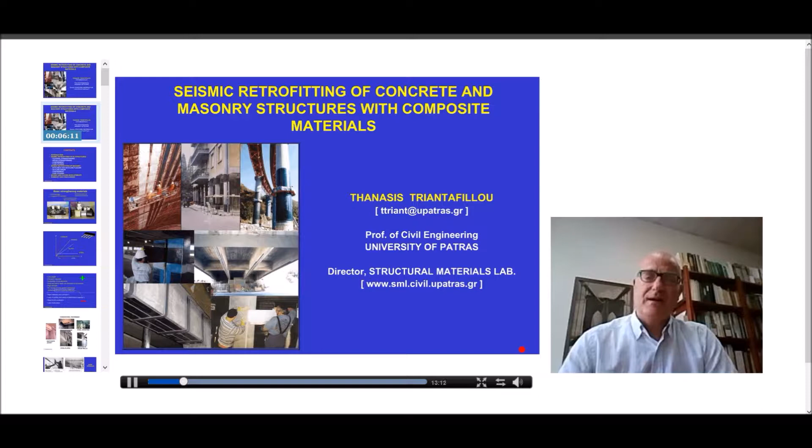Okay, thank you very much, Emmanuel. Also from my side, let me welcome everybody to this short lecture on seismic retrofitting of concrete and masonry structures using composite materials. Good morning or good afternoon or good evening, whatever, depending on where you come from. It's a real pleasure to have you around, and without spending any more time, I would like to move directly to the structure of my presentation.

I will start with a brief introduction on the topic, and then I shall present concepts and some details on seismic retrofitting of reinforced concrete structures with regards to flexure, shear, as well as confinement. We will also present some case studies on the topic, some examples.

Then I would like to spend some time on seismic retrofitting of masonry structures, unreinforced masonry structures, subjected to in-plane or out-of-plane actions like flexure or shear, also for confinement. Again, we shall see some case studies.

And if time permits, I really hope so, we will present some relatively new concepts on the use of non-polymeric materials for seismic retrofitting of concrete and masonry, and the presentation, of course, will close with a short summary and the basic conclusions.

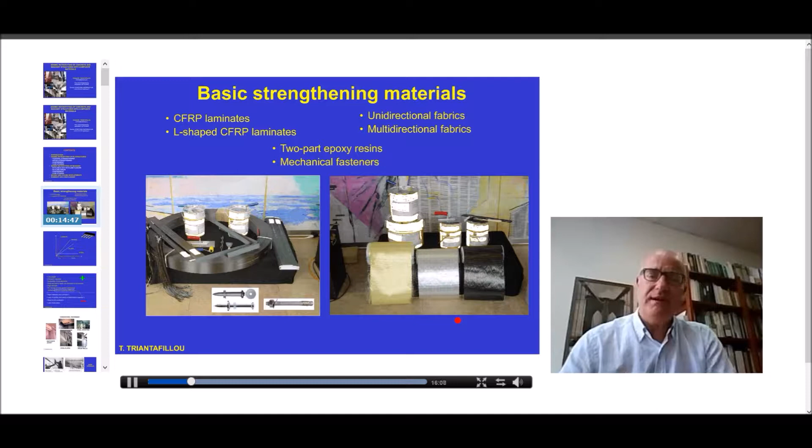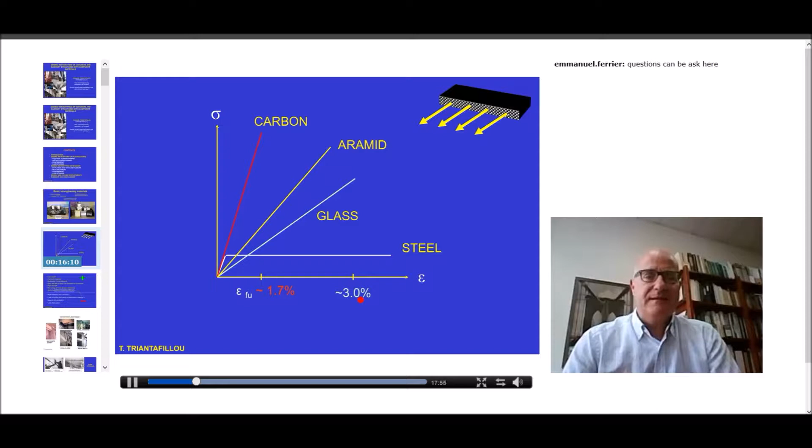So those fibers go linear elastic all the way to failure. They do fracture in a brittle way at very large stresses and at relatively high strains as well - those strains depend very much on the type of fiber. For carbon, they are in the order of 1.7%. For glass, in the order of 2 up to 3%. Aramid is somewhere in between. So let's remember that those fibers go linear elastic all the way to failure - there is no yielding, no plastification - but still those materials are, as we shall see later on, quite good and effective in the seismic retrofitting of other materials such as concrete or masonry.

Those materials are light, with low weight, on the order of one quarter in comparison with steel. They are resistant to corrosion and available at extremely long lengths, so we can have strips, fabrics, or tapes several decades, several hundred meters long.

Because they are lightweight, they are very easy and fast to apply without major disruption of occupancy. As we saw before, they have extremely high strength, 4 or 5 times higher compared with steel. They do not modify the geometrical properties of cross sections.

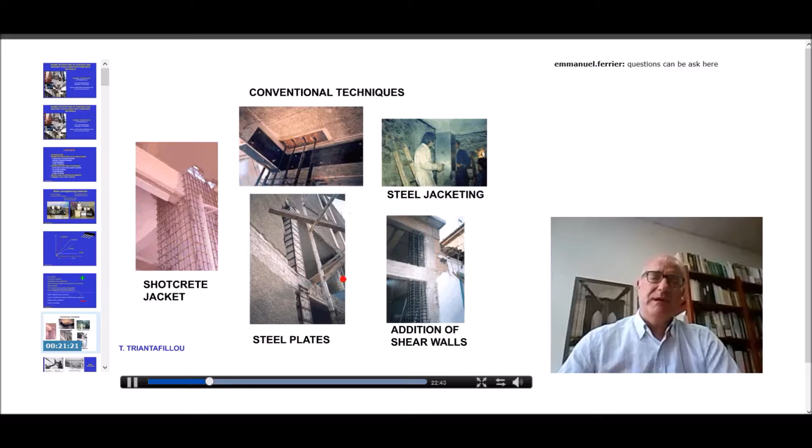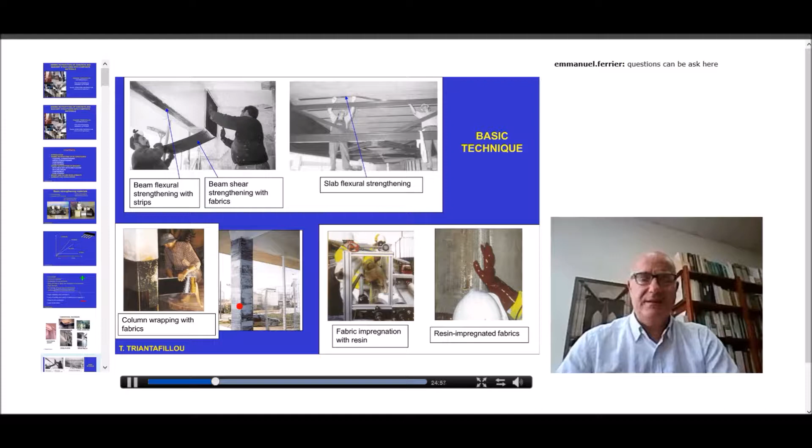I would like to say a few things about flexural strengthening. Flexural strengthening of beams or slabs is not so common in seismic retrofitting.

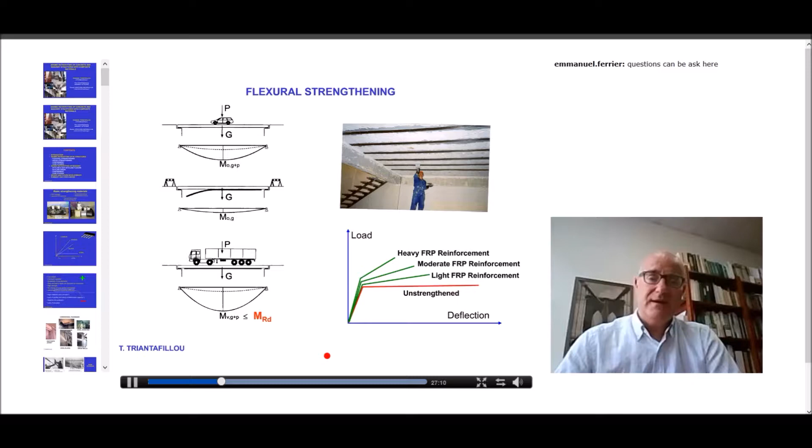As I said before, flexural strengthening of beams or slabs in seismic retrofitting is not very common. What is more common is flexural strengthening of columns, especially if we have to satisfy capacity design requirements. That is, if we need to increase the flexural resistance of columns in case they are weak in comparison with beams.

In seismic retrofitting of columns, we have to extend and anchor this reinforcement all the way through the critical regions, through the joints. Not only this, at the same time we need to confine this reinforcement externally by doing some transverse wrapping with fibers placed in the horizontal direction. That is, we make a local jacket at the ends of the members, basically to prevent local buckling of the externally applied reinforcement in the compression zone.

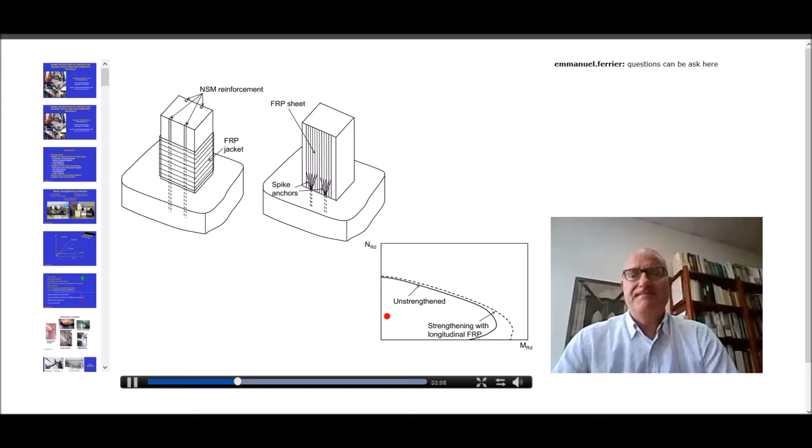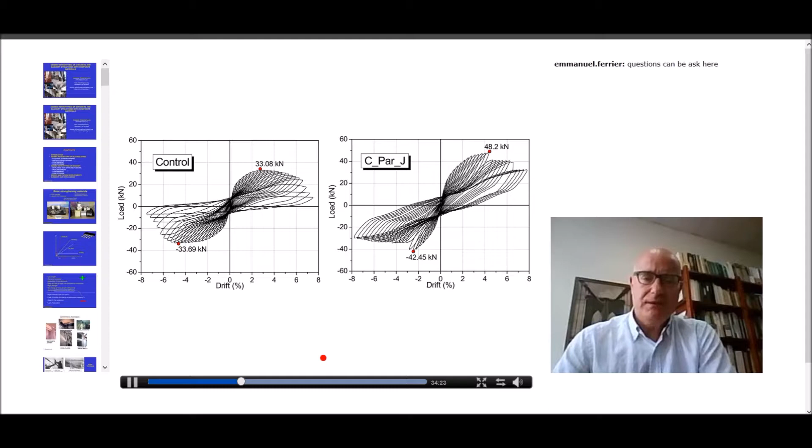I would like to talk a little bit about shear strengthening, which is probably one of the two most important applications of FRPs in seismic retrofitting of reinforced concrete. The second one being confinement, which we will discuss a little bit later on. What is the objective in shear strengthening? The objective is to increase the shear capacity. You can see a typical plot of applied shear, horizontal load in a typical column versus horizontal displacement.

What we want to do here is to increase the shear resistance of the member so that brittle failure modes, like the one shown to the left, are transformed to ductile ones. The whole idea is to add fibers pretty much perpendicular to the member axis, that is to wrap columns or even beams with fabrics so that fibers are perpendicular to the axis of the member. We can think of this concept as equivalent to having externally placed stirrups, an infinite number of stirrups on the outside, on the perimeter of those members.

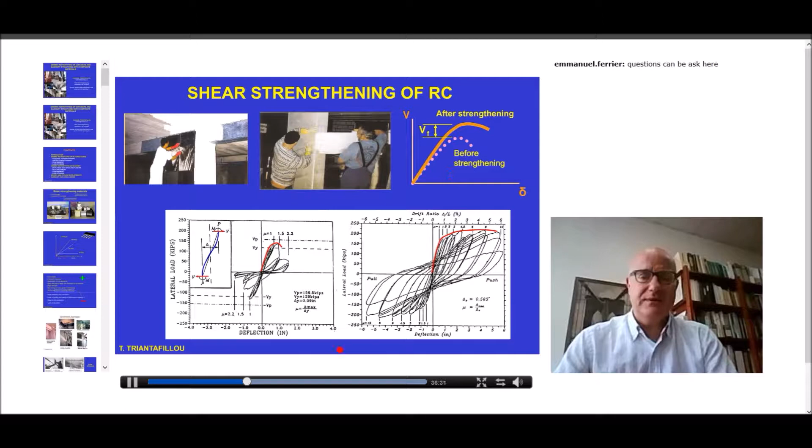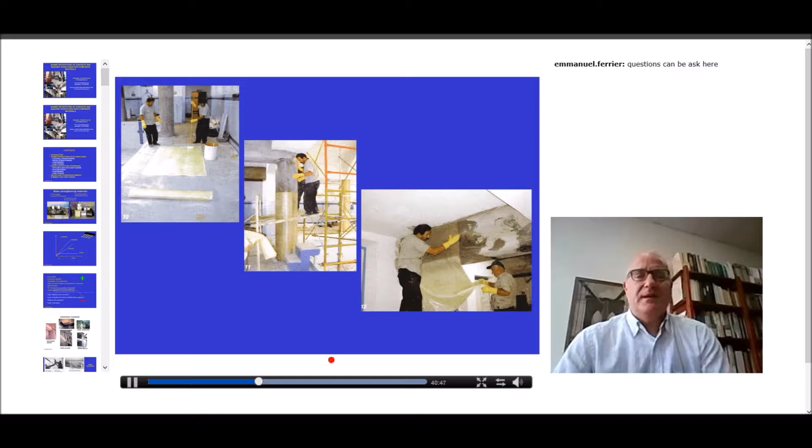Other examples, both good and bad. This is another typical example. One can use strips at a certain spacing, or continuous fabrics.

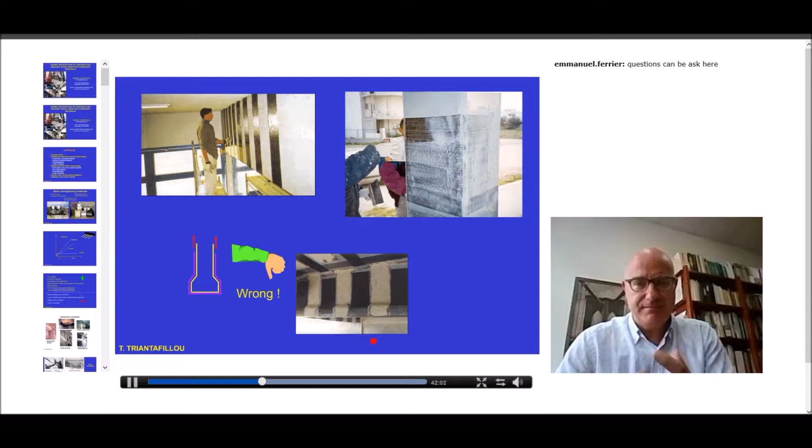In that case, one would have to apply perhaps some kind of local anchorage. So let's try to be careful when it comes to the practical execution.

Okay, let's talk a little bit about calculations. I promise not to show you too many equations. I will try to show you just the basic ones.

The design of jackets, that is the calculation of the thickness of the jacket. Or in other words, if we know the thickness of a single layer, we're talking about the calculation of the number of layers needed to get to a certain level of shear resistance.

That's the basic difference, and all we have to do is estimate, to calculate this second term. This second term can be calculated by using a formula identical to the one we use for internal stirrups, except that we don't use a yield stress here. We don't have a yield value for the stress in the FRP.

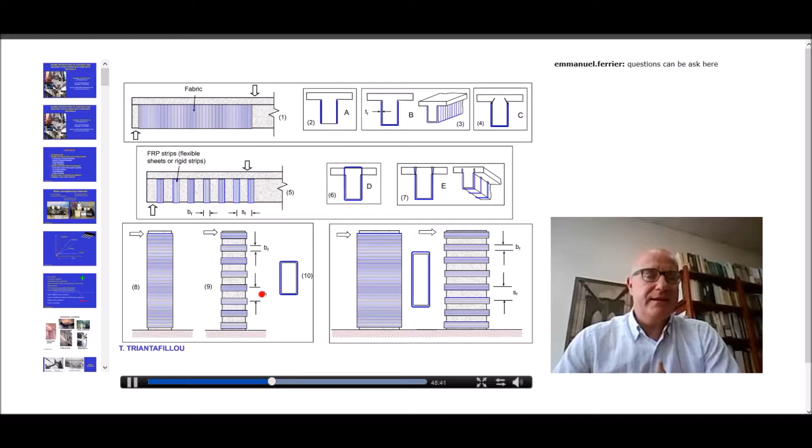So this is the reason why I emphasized earlier, let me go back to this slide. Yeah, here it is. This is why I emphasize that having full wrapping, having the fibers all around the members, is much more effective in carrying stresses in shear strengthening. Okay, let's go back.

What can we do if wrapping all around the cross section is not practically feasible? We can use anchors, for example the so-called spike anchors.

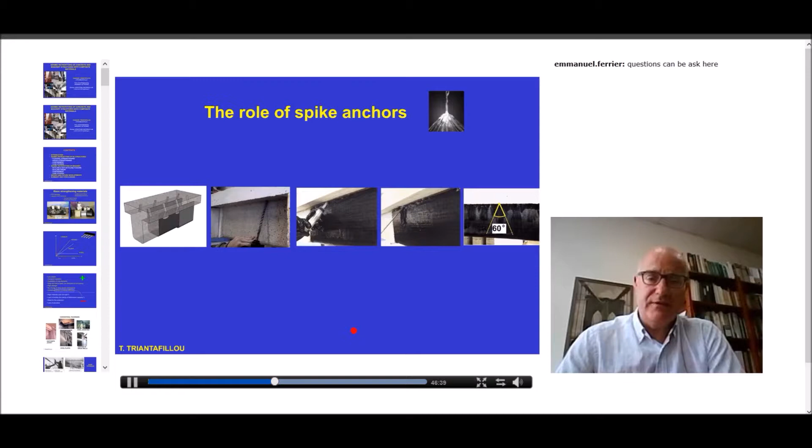Those anchors are actually quite effective, and to prove this, let's take a look at some graphs which show the percent increase in shear resistance as a result of strengthening for different cases.

So this is better, but it gets much better if anchorage is according to the way I described before - using spike anchors with half their length inside the slab, so stresses are directly transferred from the jacket to the concrete. If we decrease the spacing of the anchors, that would be even better. The main concept is combining U-shaped jackets with spike anchors at a reasonable spacing, which is much more effective compared to the 3-sided jacket without anchorage.

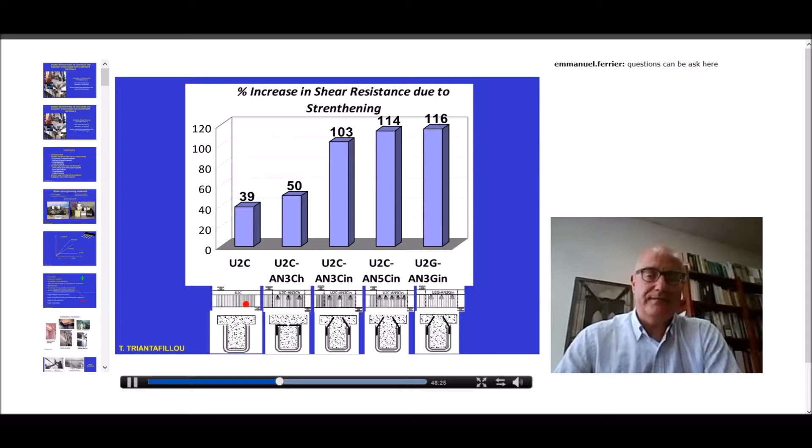So inside the joint panel, those fibers are in both directions and they are quite effective in carrying shear. To make sure they work inside the joint panel, the fabrics should be anchored outside the joint area, for example using transverse FRP tapes or metallic anchors or any kind of anchorage system you can imagine. The idea is to make sure the fabrics are anchored beyond the joint area.

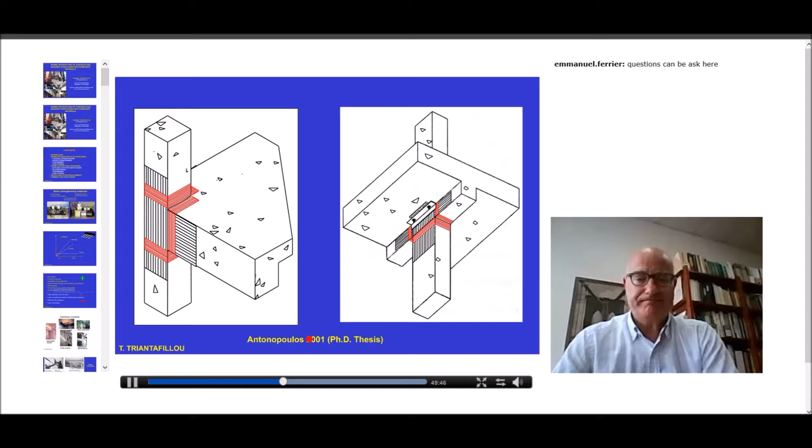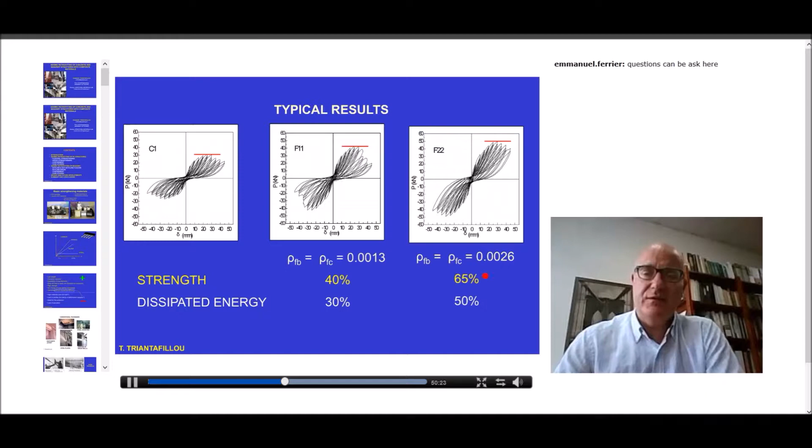Typical results of the response of joints. This is a control specimen without any retrofitting, showing shear force in the joint versus a measure of displacement. The response of an identical joint if we use a single layer of low thickness carbon fabric, and that's where we go with a couple of layers. There is a substantial increase in strength, 40% for one layer, 65% for 2 layers, and also an increase in dissipated energy.

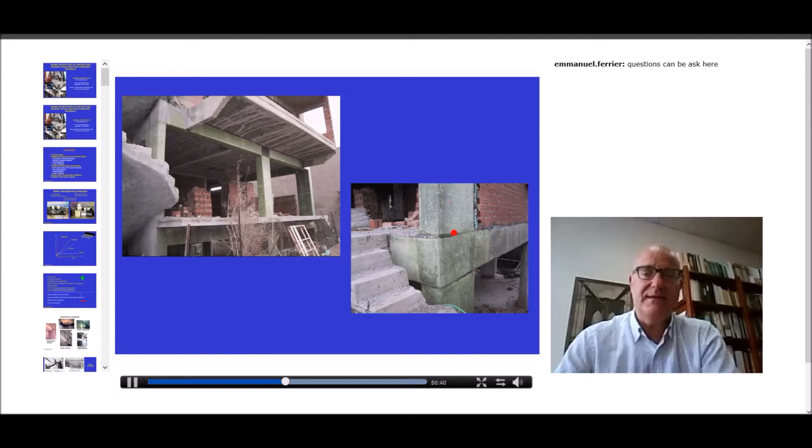And a couple of photos on how those fibers are applied - we have both horizontally placed as well as vertically placed fibers in the joint area.

Confinement is probably the most interesting application of FRPs in seismic retrofitting. We do confinement for mainly 4 reasons. The one not so much related to seismic retrofitting is confining concrete with FRP jackets to increase the strength of concrete, so that you can increase the axial capacity of the member. If we need to upgrade columns or piers in a bridge due to heavier traffic load, that would be the way to do it.

However, in seismic retrofitting what is much more interesting is to do local jacketing, wrapping the ends of columns with local FRP jackets to increase the deformation capacity. By this local confinement we increase the failure strain of concrete in the compression zones, and by increasing the ultimate strain of concrete we can develop higher deformation, so the member is much more ductile. This is the whole idea. We also do this local jacketing in case of lap splices.

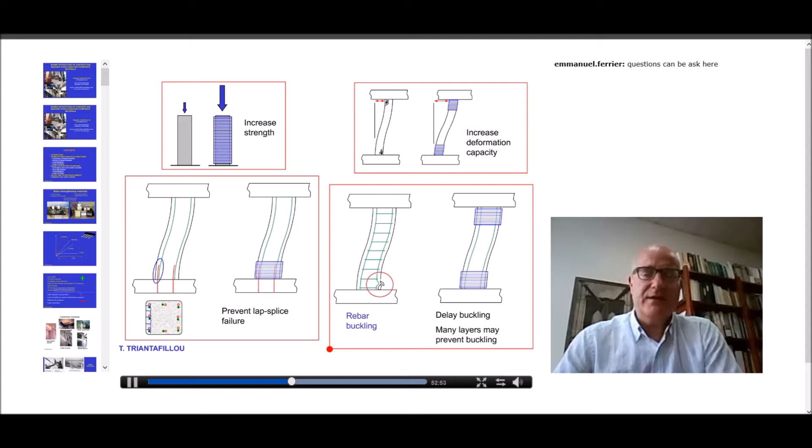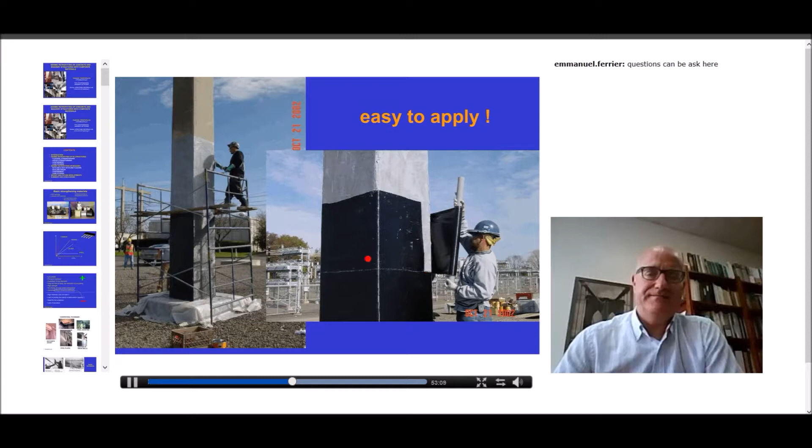I will spend a few minutes on each of those applications in my next slides. Before doing so, let me illustrate how easy it is to do those jackets for confinement. Labor is quite limited. The material is extremely lightweight, so it can be wrapped easily around members without major disruption. So in most cases, we have a clean job.

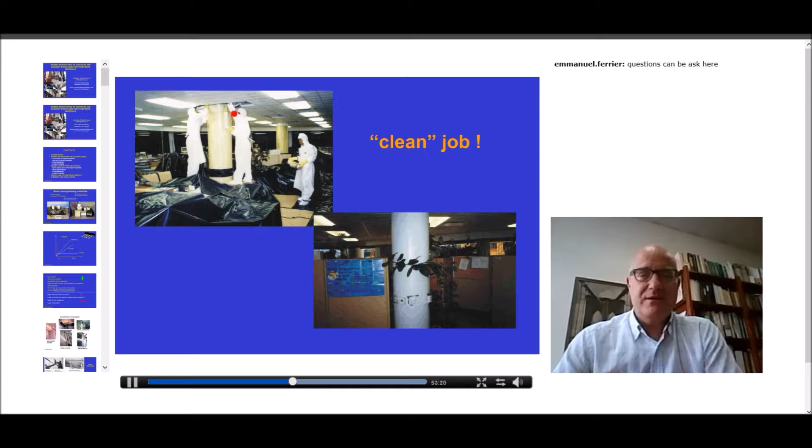And okay, let me skip this.

I will not really spend a lot of time on the basics of confinement. I hope that most of us are familiar with the topic. The whole idea is to wrap concrete all around with fibers in the circumferential direction so that when concrete expands due to the application of axial compression, those fibers on the outside are activated in tension, just like internal stirrups do. And by doing so, those fibers return compressive stresses in the concrete, and that lateral compression results in increasing both the strength and the ultimate strain and deformation capacity of concrete.

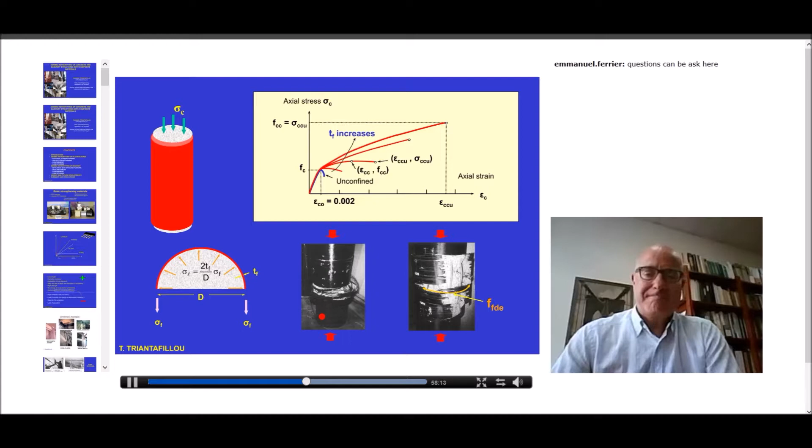It would be equal to 1 for circular cross section. For square cross sections it's different, but it would be much less than 1 as the cross section becomes rectangular with a high aspect ratio.

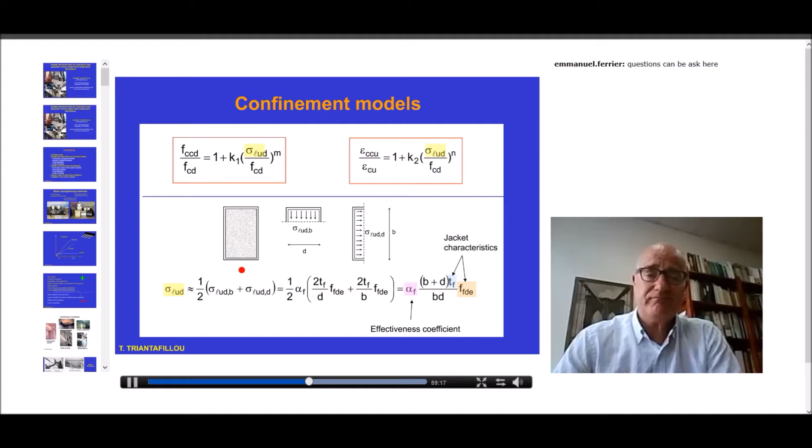This confinement effectiveness coefficient is defined by the ratio of the confined area—this is the effectively confined concrete area—divided by the total area of the cross-section. And clearly that depends on the shape of the cross-section, on the aspect ratio in case of rectangular cross-sections, on the radius at the corners.

So what maximizes confinement in rectangular columns is we should try to keep the ratio of the two sides as close to 1 as possible, and we should try to maximize the radius at the corners.

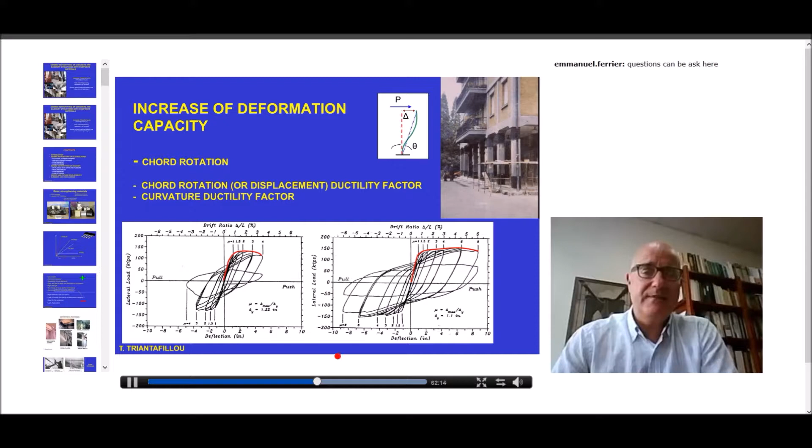Chord rotation is defined here in this figure, the so-called theta. This is the angle between the axis of the member and the chord of the member at its deformed configuration. So that theta increases, also the respective ductility factor mu theta increases, as well as the curvature ductility factor. This is the main reason that we do this local jacketing in seismic retrofitting, to increase the chord rotation or the respective ductility factors.

That is illustrated by comparing the response of two identical columns, one without any retrofitting, and an identical one with retrofitting. This is wrapped with a couple of layers of carbon fibers at the bottom. You can see the column. It is a cantilever type member subjected to cyclic horizontal displacements. You can see, I will try to zoom if possible here.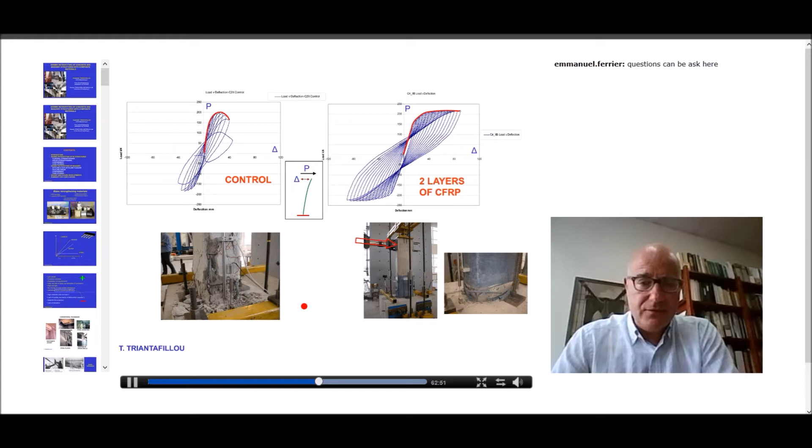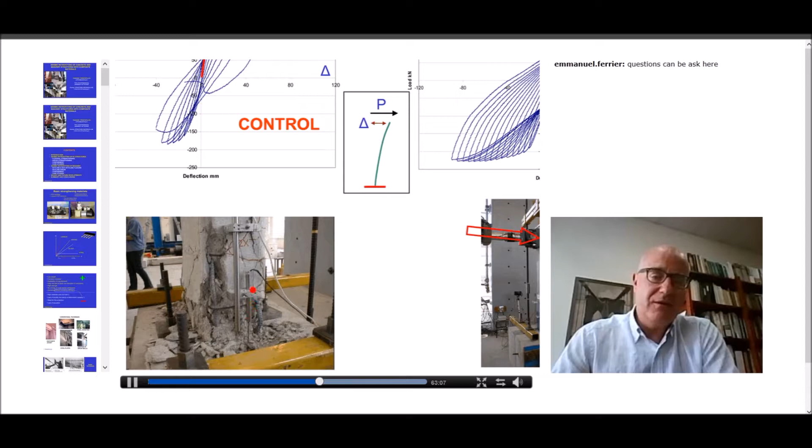You can see how the member fails. I hope you can see the zoom. You can see the typical failure of the column at the base in the compression zone. We have spalling of concrete, local buckling of the longitudinal reinforcement, which is not the case if the member is wrapped with this local jacket with carbon fibers at the base. Those carbon fibers would fail due to tensile rupture.

So by comparing the response of the two, we conclude that again there is practically no difference in the strength. However, there is a tremendous increase in deformation capacity. Ductility goes really high.

I am not sure that everybody is able to read numbers, but I can assure you that the drift values are quite high. We are talking about horizontal displacements in the order of 100, if not more, millimeters, corresponding to a column height in the order of 1.6 meters. So that's a very high drift.

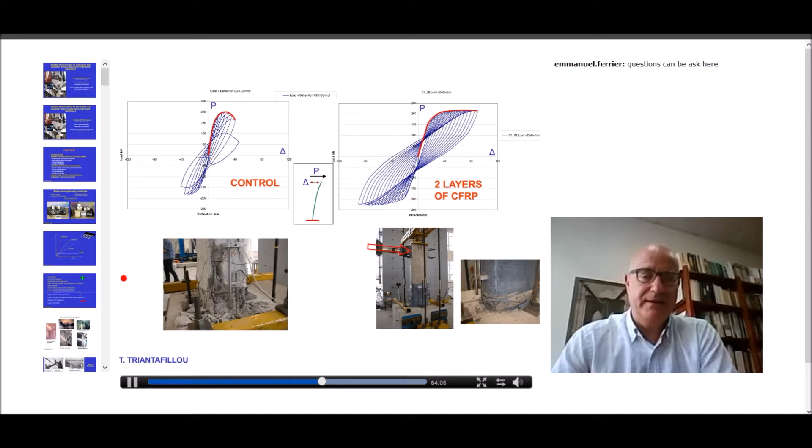Let's see how we would do calculations. Again, we don't have the time to discuss the details, but at least we can take a look at the basics. The whole idea is to express the chord rotation of the member at failure. This is the ultimate chord rotation.

This is expressed as a function of the curvature at failure—this is the ultimate curvature of the member. The ultimate curvature is calculated by dividing the ultimate strain, this is the maximum compressive strain in the concrete, divided by the neutral axis.

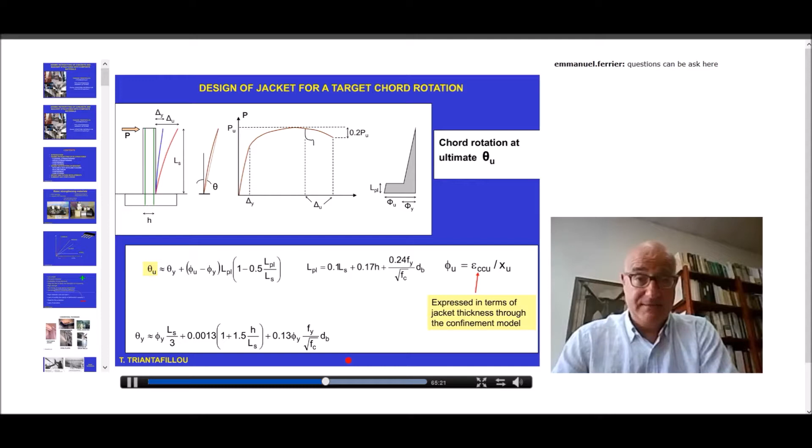By wrapping the member, we increase this value here, the value for the ultimate strain, and that can be calculated from our confinement model, the one discussed before. So by increasing that, we get a higher value for the curvature at failure, which in turn results in an increase in the chord rotation. So the chord rotation at failure increases, as well as the respective ductility factor.

An alternative approach to calculate this ultimate chord rotation would be to use empirical formulas like the ones found in Eurocode 8. This is copied from Part 3 of Eurocode 8. Those formulas give, in an empirical way, the ultimate chord rotation as a function of different parameters like the reinforcement properties, the volumetric mechanical ratio of reinforcement, the shear span, the height of the cross-section, but most important, as a function of the confinement, the volumetric fraction of fibers in the cross-section. It is this term here.

So for a given target value of the ultimate chord rotation, one can calculate the number of layers, the thickness of the jacket that would result in such a value.

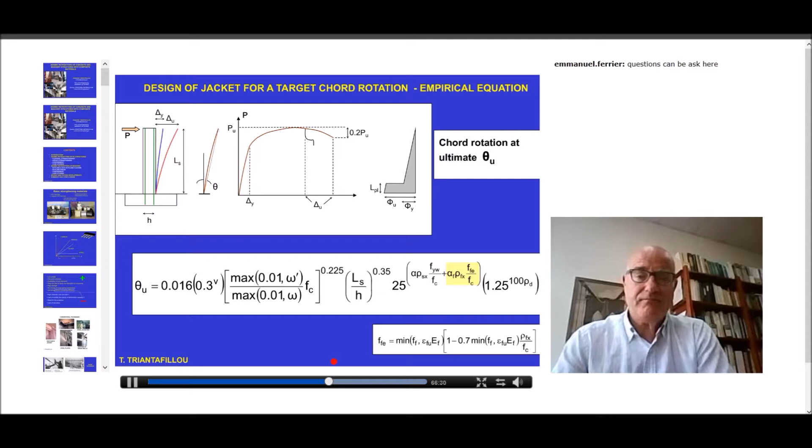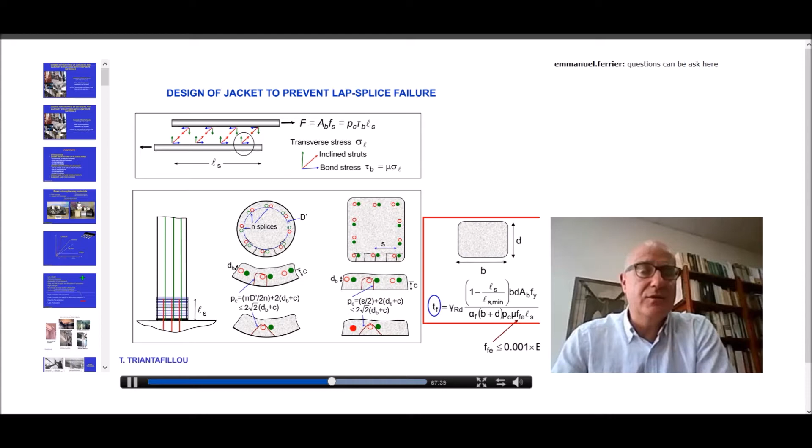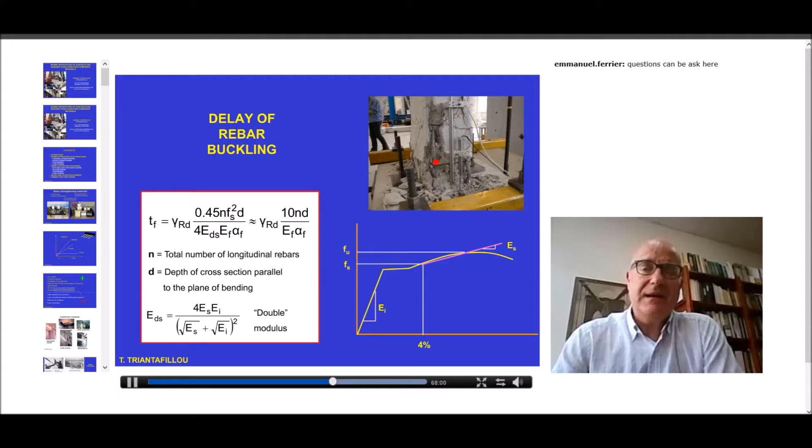I will not go into the details of the derivation of these formulas, but by applying external compressive stresses, confining stresses, we increase the friction, and by using a friction model, we can calculate the required thickness of the jacket, that is the number of layers, so that this frictional failure at lap splices would not develop. Last but not least, one can rely on semi-empirical formulas like the ones shown here to calculate the required thickness of the externally applied local jacket to delay buckling of the longitudinal reinforcement.

Let's try to wrap it up, to summarize. We have to assume that our intervention does not result in stiffening. We have to make sure that stiffening of our member is not a requirement. If that's the case, then we should design jackets for the target shear resistance. That is, we should do shear strengthening of the member if needed so that we satisfy capacity design requirements.

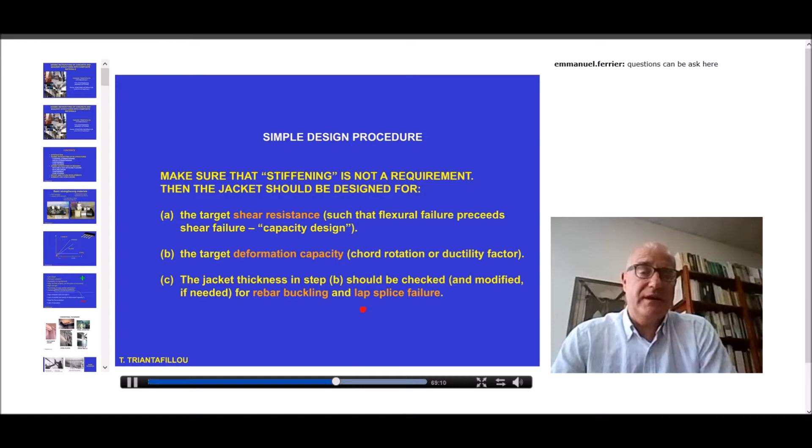Then we need to design jackets for the target deformation capacity, that is for the chord rotation or the ductility factor. And then the jacket thickness corresponding to the previous step should be checked and modified if needed, if rebar buckling controls or if we expect lap splice failures.

I hope that this example can make this story a bit more clear. Let's assume that using the models we discussed already, we have calculated that we need, for example, 4 layers to increase the deformation capacity, the ductility. We need 2 layers to prevent lap splice failures, 3 to delay rebar buckling, and 2 layers to prevent shear failures. In this case, we apply 2 layers all along the length of the column, and we add 2 more at the ends, so that we have a total of 4, and by doing so we satisfy all requirements at the same time, the shear resistance as well as all the other failure modes.

We should remember, though, that we don't increase the stiffness, we do nothing about second order P-delta effects, and we don't increase the flexural capacity of the member. This is only for ductility as well as for shear resistance. There is no improvement with regard to the flexural resistance of the member.

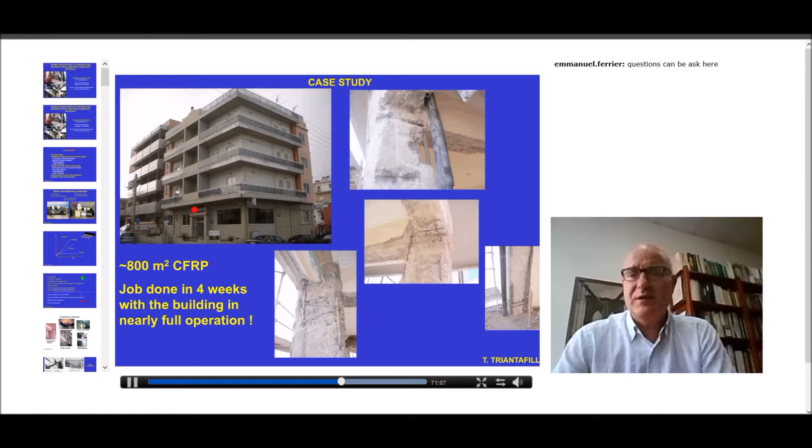A case study is what follows here. This is an example of a building that was retrofitted a few years ago in the south part of Greece, in one of the islands. It's a 4-story building which was retrofitted through the use of approximately 800 square meters of carbon fibers. The job was done in a very short period of time. That was the prime requirement in this intervention, to have the job done as quickly as practically possible, with the building nearly in full operation.

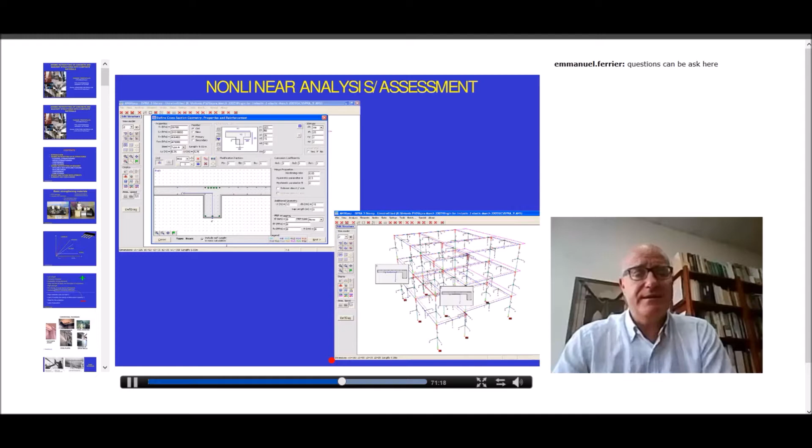And that was achieved by shear strengthening of the columns where needed, by shear strengthening of the beams, basically at the ends where shear forces are high, by shear strengthening of the beam column joints, and flexural strengthening in some of the cantilevers was also done in this particular project.

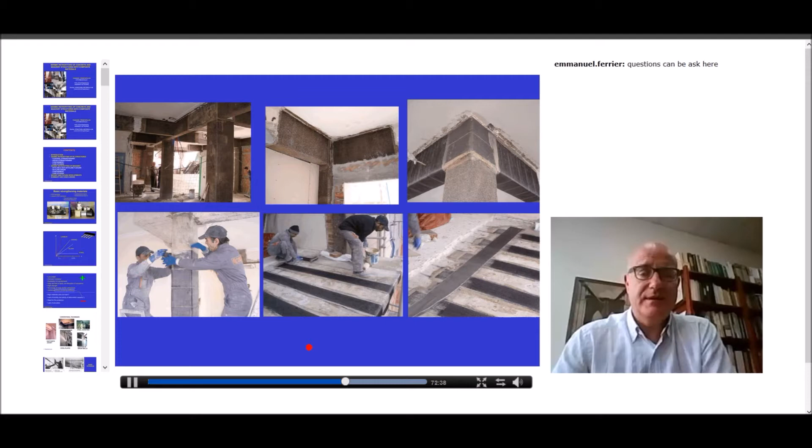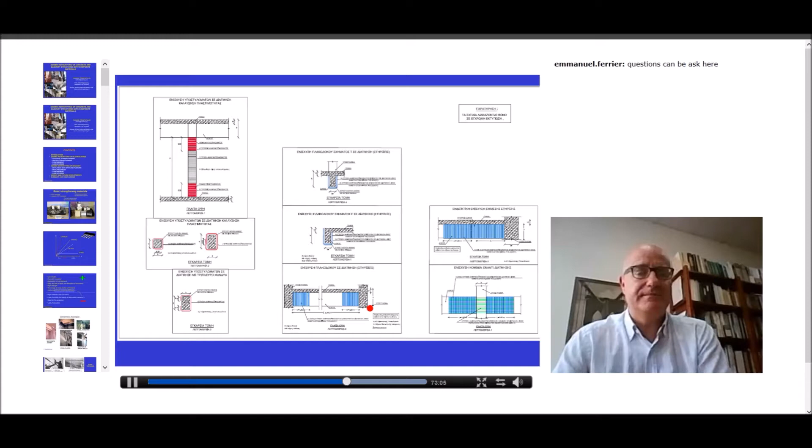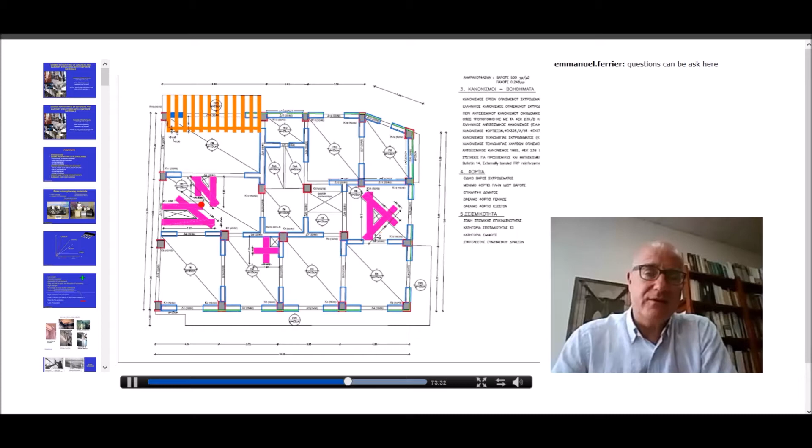And a typical plan view illustrating all the different interventions. Red is for confinement, blue is shear strengthening of beams, red is also for shear strengthening of columns, yellow is flexural strengthening of cantilevers, purple is strengthening around the perimeter of areas where some holes had to be created, etc.

I think we have to speed up a little bit, so I will skip my second example to spend some time on seismic retrofitting of masonry with FRPs.

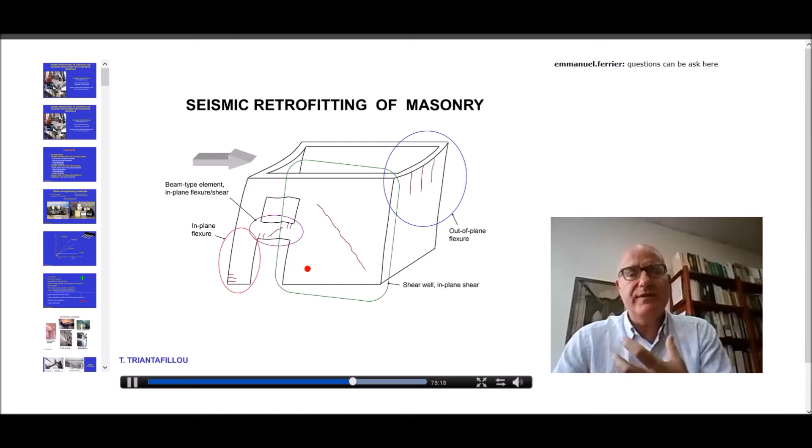Those would behave like unreinforced concrete columns, subjected to bending in combination with axial loading. Or we may have beam type, short beam type elements subjected to a combination of flexure and shear. So depending on the action, depending on the type of the structural element, one has to think, to conceptualize and design the retrofitting scheme.

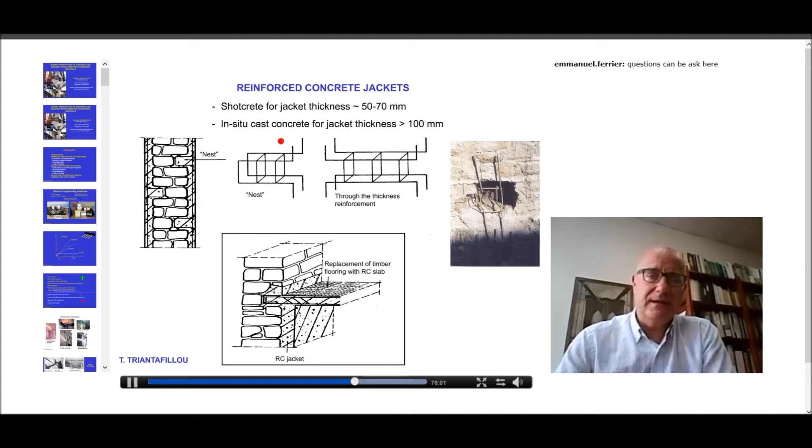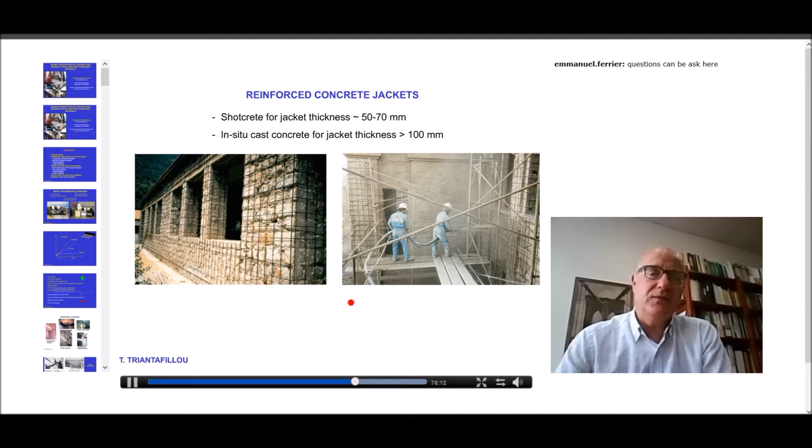Which is illustrated here. We need steel reinforcement and also shotcreting to provide the outer faces of this sandwich. The method is quite effective in terms of strength, ductility, stiffness, etc.

So what can be done? What is the way of doing things? Let's take a look at some typical examples. Let's assume we are talking about out-of-plane bending of walls. We need fibers to play the role of tensile reinforcement in the tension zone.

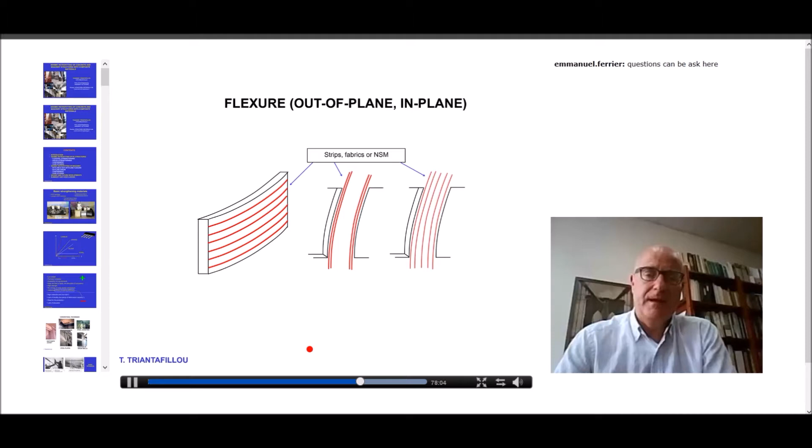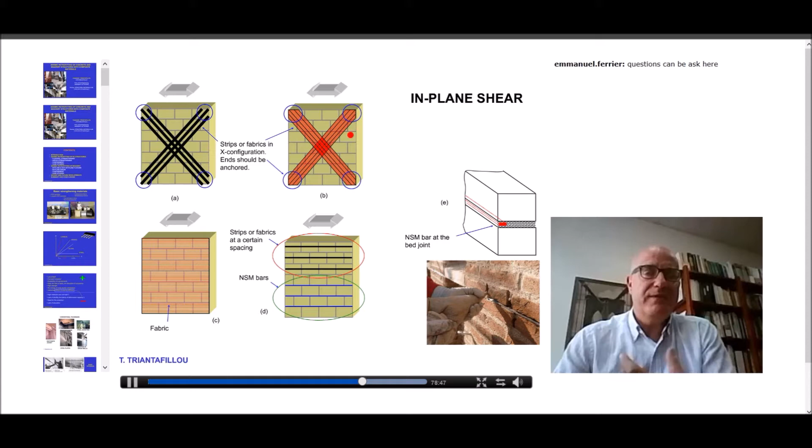If we're talking about in-plane shear of masonry, then we should apply diagonal strips, or perhaps fabrics on the full area, on the full surface of the wall. We can even apply strips at a certain spacing. We can insert FRP rebars inside bed joints and then hide them with mortar, so that we provide tension reinforcement that would increase the shear capacity, the in-plane shear capacity.

When it comes to confinement, we need the fibers placed horizontally to confine, for example, rectangular in-plan structures, domes, or even columns.

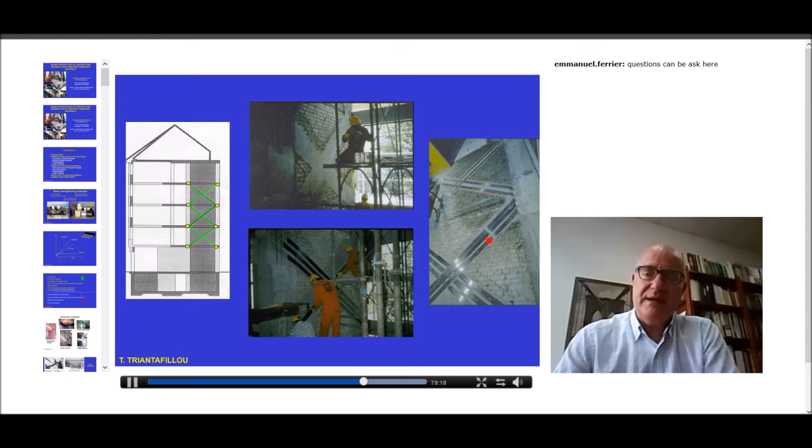A few photographs to illustrate the concepts. These are some photos illustrating the application of diagonally placed carbon strips to increase the in-plane shear capacity. The same concept here. That's a photo from Iran taken a few years back to do the same job.

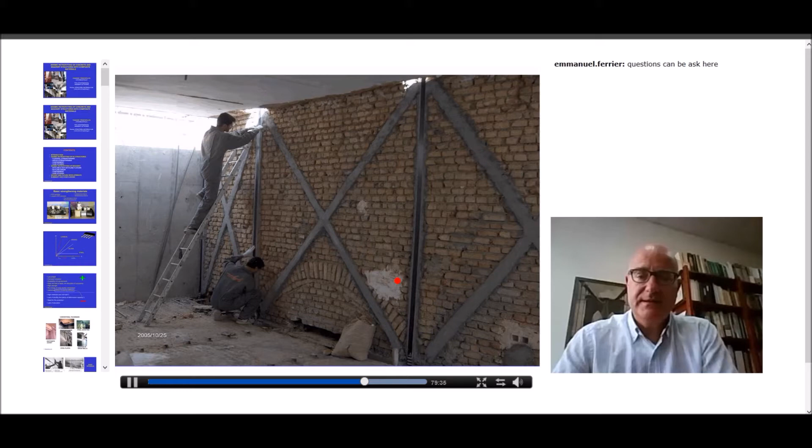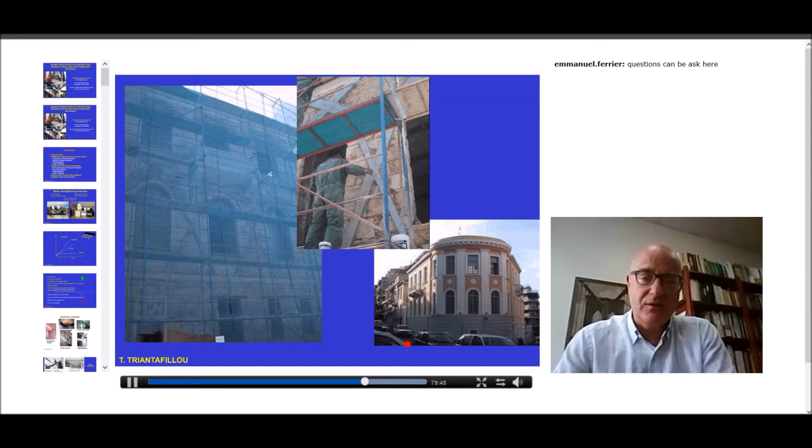That's from a school building in Greece. Again, the idea is to have those diagonally placed elements play the role of tension reinforcement.

Out-of-plane bending of vaults and arches can be controlled. The behavior can be improved by eliminating a certain number of plastic hinges which would develop at failure of such members. For example, an arch subjected to earthquakes would fail through the formation of hinges. The formation of those hinges can be prevented by adding external reinforcement on both sides, or on one side if it is not practically feasible.

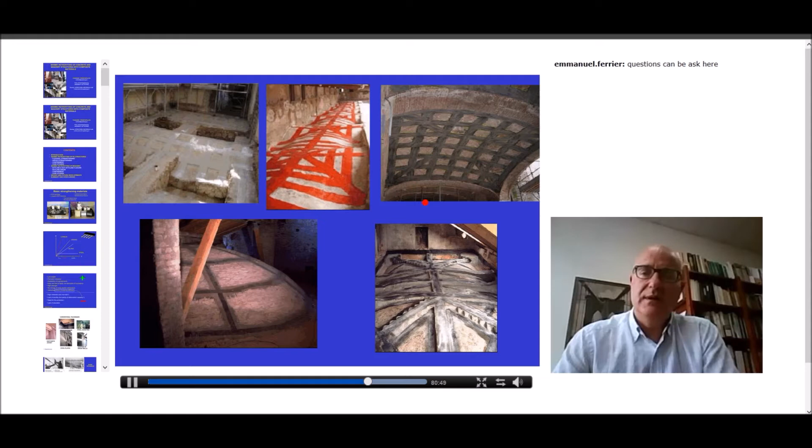Some photos, most of them from a few of my good colleagues in Italy. You see consolidation of domes by using carbon fibers on top or sometimes underneath, at the bottom. Same story here. Yeah, that's an interesting application.

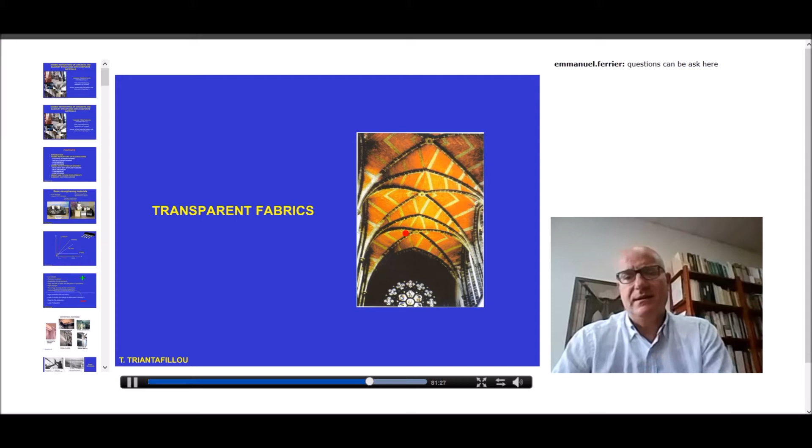That's one of the earliest applications of FRPs in dome-type structures, illustrating the possibility of using transparent fabrics. This is a glass fabric using a special type of resin which does not really affect very much the aesthetics. The fabric itself is transparent, so the intervention, the jacket, is not visible.

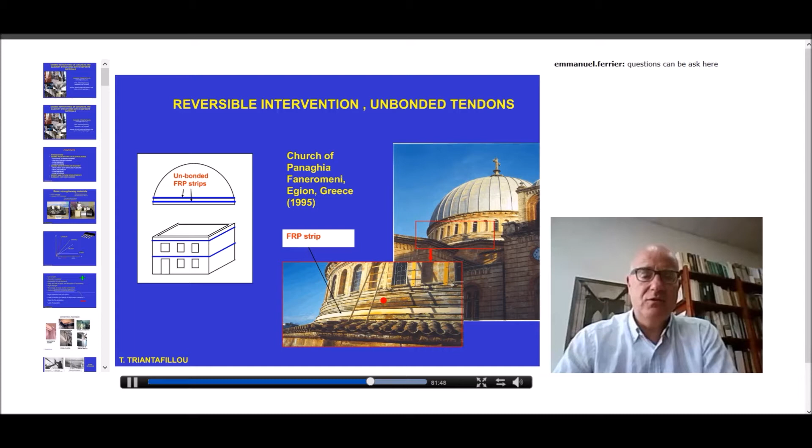A similar application: we have full wrapping of rectangular in-plan buildings using carbon tapes at 1, 2, 3 levels here, and 1, 2 levels in this photo to the right. Similar example.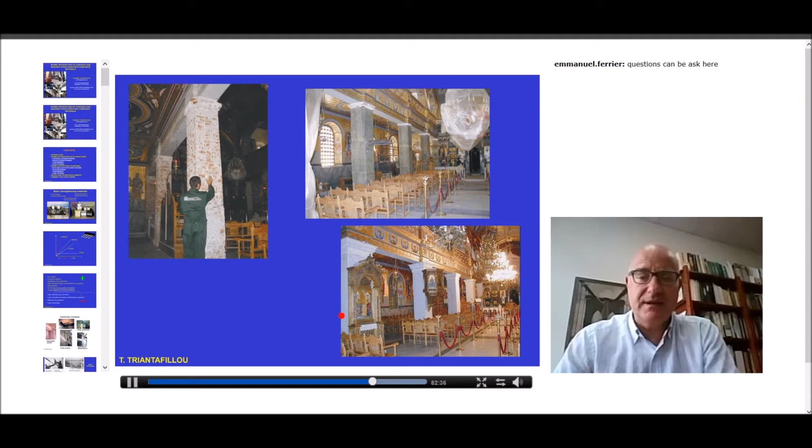Photos from full wrapping of columns. That's a typical masonry column - the bricks are exposed prior to wrapping the fibers. A photo of the same columns after wrapping with glass fibers, and then the finished columns where plastering has been applied, with some decoration and painting. Again, the same concept: confinement through full wrapping of columns from top to bottom.

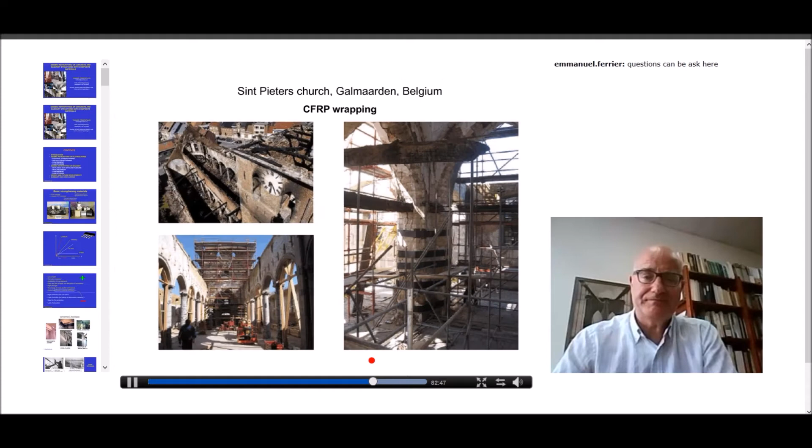Well, there are many applications worldwide. Let me just say a few words about calculations. Unfortunately, time is not enough to give all the details, but at the least we should remember that we should apply concepts very similar to those used in the dimensioning of reinforced concrete.

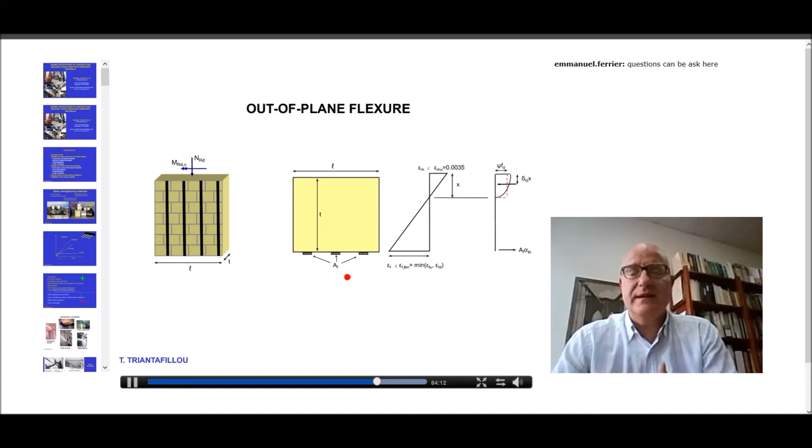For example, we can idealize masonry as concrete without any internal steel. If you have a wall subjected to out-of-plane bending combined with axial load, this is a typical cross section. We need external reinforcement in the tension zone to carry tensile stresses and increase the flexural capacity. We need to look at strain compatibility and equilibrium of internal stresses in the cross section, and by considering this equilibrium we can calculate the depth of the neutral axis, and also get the required area of this external reinforcement to reach a target value of the resisting moment.

Likewise, for the case of in-plane flexure combined, for example, with axial loading, there is really not much to say here, except that we just have to use already known concepts for reinforced concrete. The only difference is that our reinforcement is a non-yielding material, one that goes linear elastic all the way to failure.

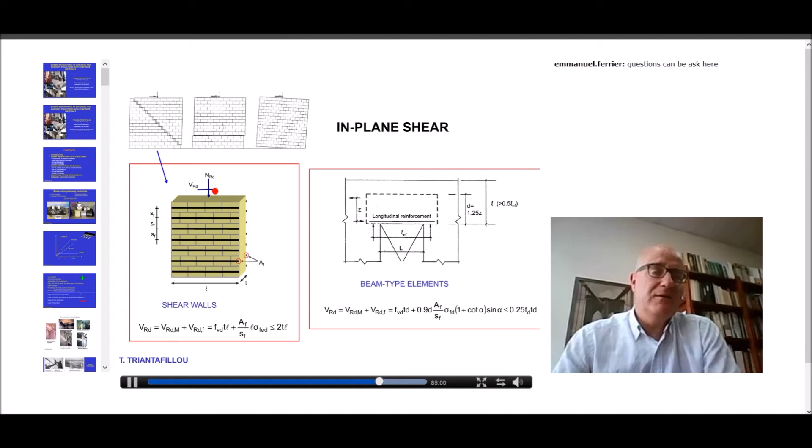Another example: in-plane shear can be calculated by idealizing those horizontally placed fibers in a way analogous to stirrups in reinforced concrete.

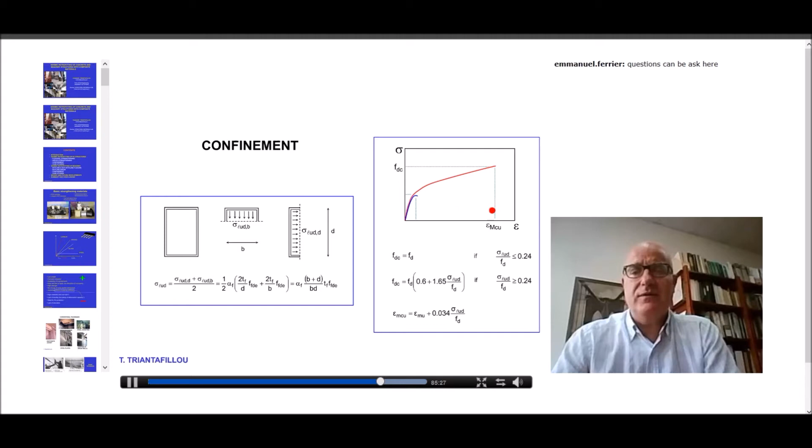Confinement, again - all we need is a confinement model very similar to what we have discussed already for concrete. By using this model, we can calculate the thickness of the jacket, the number of layers, so that one could reach a target value for the strength or for the ultimate strain of the masonry.

We don't have that much time left, but I would like to spend at least 5, maybe 10 minutes maximum to discuss an alternative technique - one that is actually quite similar to what we have been talking about so far, the FRP strengthening techniques, the only difference being the type of materials used.

There is a number of problems associated with polymer-based composites. We discussed this already: we have a problem with the poor behavior of epoxy resins at high temperatures. Also, those resins are quite expensive, and sometimes we are not allowed to use them. If we're talking about strengthening monument-type structures, old masonry buildings, resins are not compatible - we are not allowed to use them.

If we do seismic retrofitting and make jackets using FRPs, it may very well be the case that damage behind those jackets is not visible. For those and many other reasons, we have been trying for the past 10-15 years or so to replace polymers, to replace epoxy resins with mortars, with cementitious materials, with inorganic materials, so that the matrix in the composite is mortar-based, and the fibers, of course, are not unidirectional fabrics, but have to be in the form of a textile with an open architecture, as illustrated in these photos, so that we have a good mechanical interlock between the fibers and the matrix, the inorganic material and the mortar.

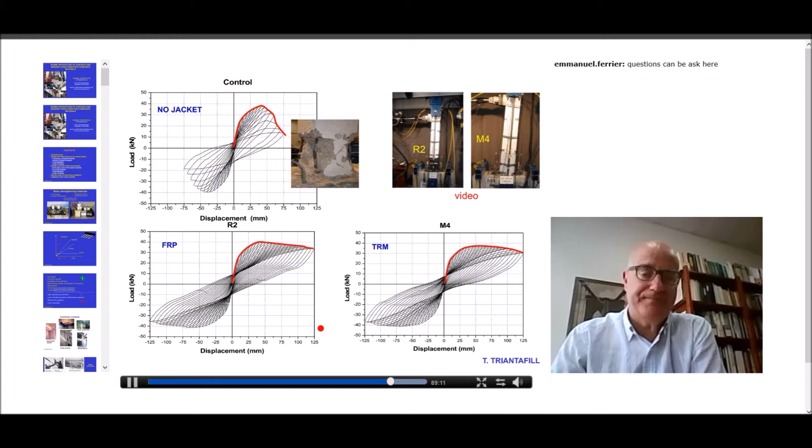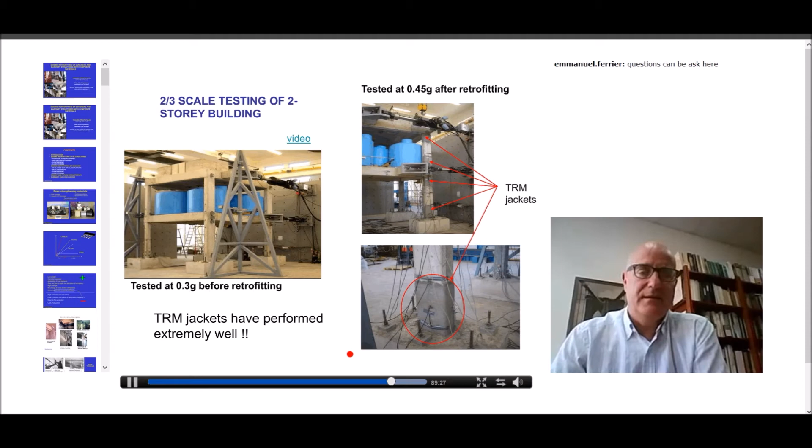The concept has been validated doing small scale as well as full scale, nearly full scale experiments. It has been proved that those TRM jackets perform extremely well, for confinement as well as for shear.

Their application is by far more interesting in masonry, in unreinforced masonry, in comparison with concrete, mainly due to compatibility issues. Those materials are friendlier, more compatible to masonry substrates, and also because stresses are typically multidirectional on masonry walls. Those bidirectional textiles are quite more effective than the FRP fabrics.

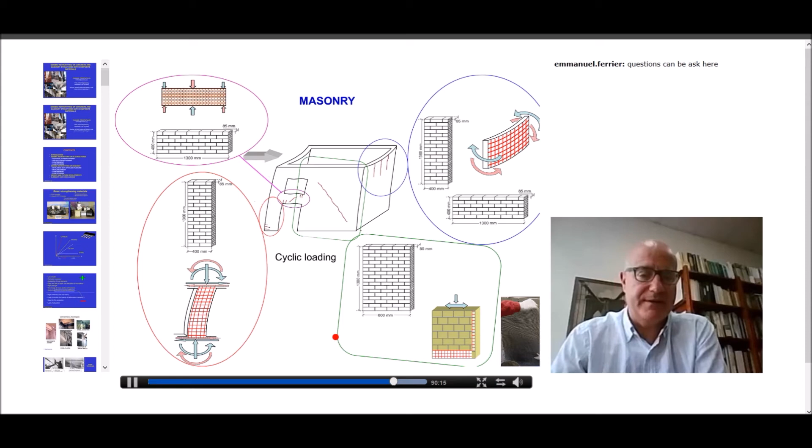One can prove that by doing simple tests. I will only show you some typical results. For example, if you have a shear wall, a masonry wall subjected to in-plane shear, the response of this member in the absence of jacketing, in the absence of strengthening, would be what is illustrated in red by the red curve.

If you retrofit it using a single layer of an FRP, that is an epoxy-based jacket, you would get what is illustrated in black here. If you do a TRM, a textile-based jacket, you get what is illustrated in black to the right. By comparing the two, you see that TRM is nearly as effective as FRP, and by far more, and we get a much higher increase in capacity in comparison with a control specimen.

Same story for masonry subjected to in-plane bending in combination with axial load. TRMs are quite effective. You have substantial increase in strength as well as in ductility, which is even higher in comparison with FRPs.

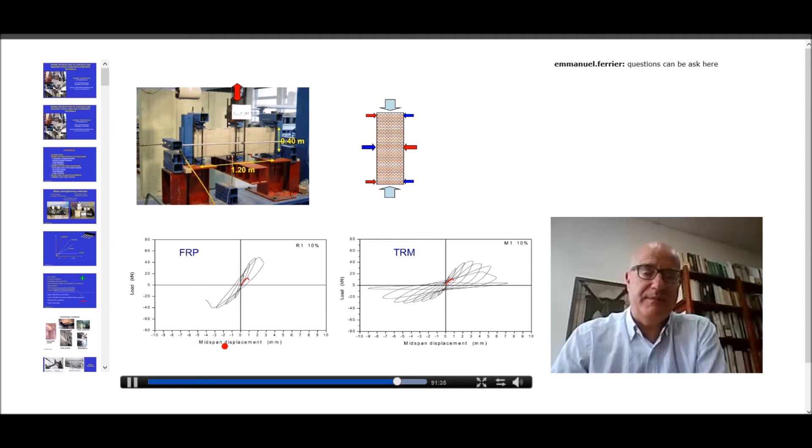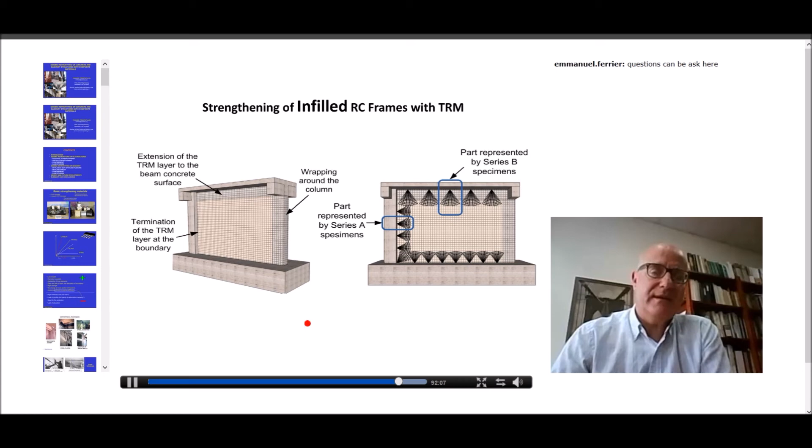I would like to just illustrate, going to nearly the last of my slides. This technique is quite interesting to also strengthen infill walls in reinforced concrete frames, in an attempt to make infills work together with the surrounding reinforced concrete structural elements so that structures become stronger and stiffer.

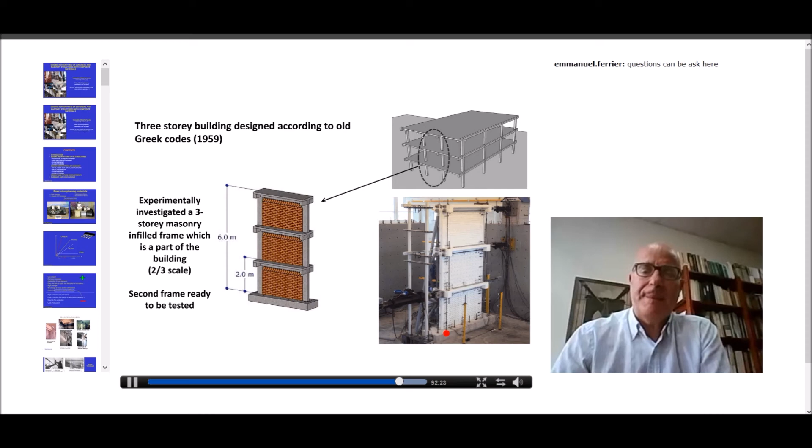You can clearly tell the difference. The damage is limited, is reduced. The strength is increased by nearly 50% in that particular example. The deformation capacity also gets higher, etc. So it is really an interesting concept for the case of infills in reinforced concrete frames.

I believe that this is the last of my slides. I think we have had enough for today. Let me try to wrap it up and give you the main conclusions.

I think the FRP strengthening technique is easy, fast, and quite effective. Easy to apply, quite fast, and quite effective when it comes to mechanical behavior. In order to do calculations, we need to have in mind some basic principles. Number one, forces in FRPs are carried only by the fibers. The material is linear elastic all the way to failure, and it has a large deformation capacity.